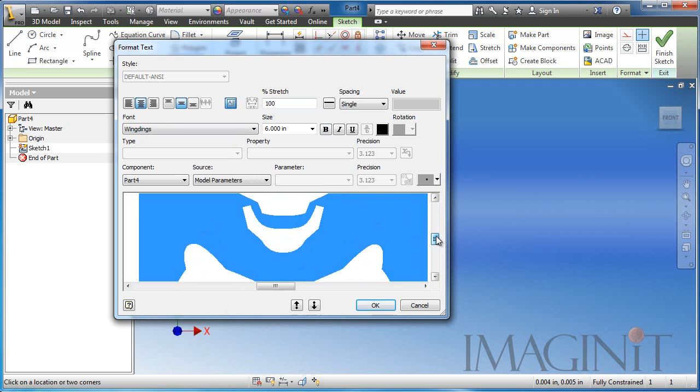I'm going to use Wingdings, and this is actually where I get the font for the Skull and Crossbones. We'll click OK, and I just want to take a moment and center this up, make it perfectly centered at 0. So we've got our initial sketch done.

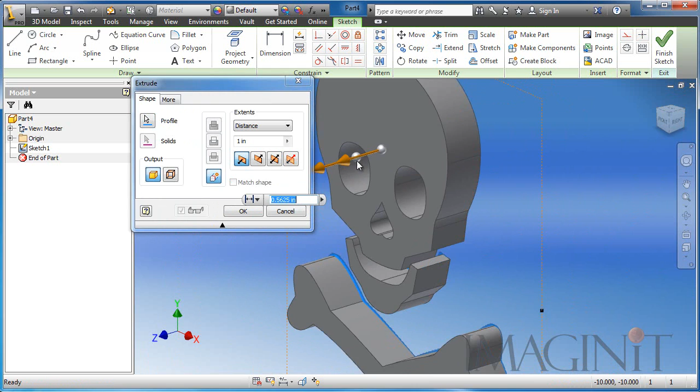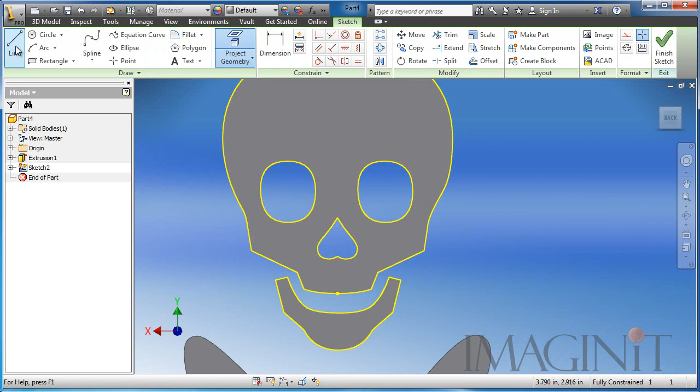I'm going to create a sketch on the back side, and I'm going to project the geometry of the jaw here. I want to draw some lines, and in this example, when I draw these lines, I do not want constraints to be added. So I'm going to hold the control button down, and that eliminates constraints from being drawn in our design.

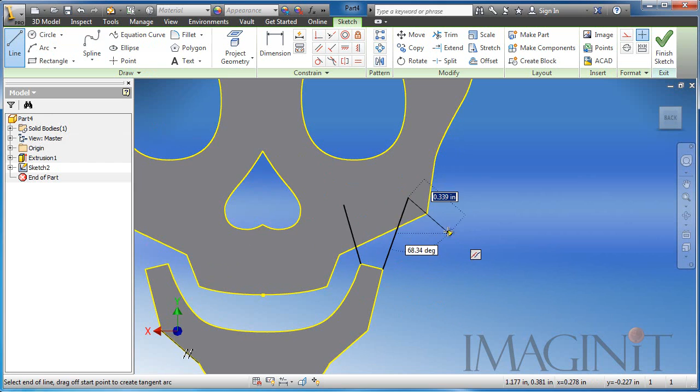Hold the control button down while I click, and I'm just going to draw these 4 lines. About there. And one more right about there.

I'm going to add some constraints. I'm going to add a collinear constraint to these outer lines and a parallel constraint to the inner lines.

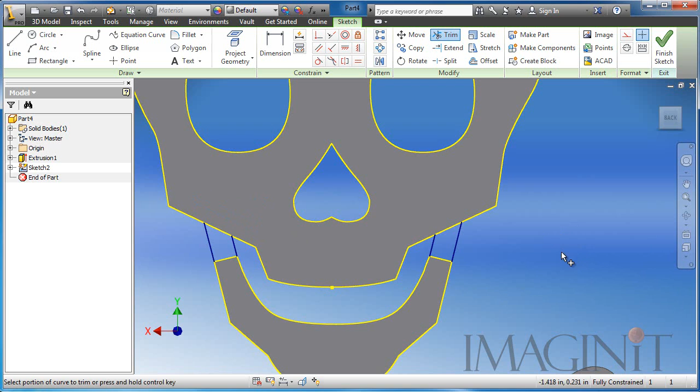I'm going to use my trim command. This is one of the nice features in 2013. I can simply hold the left button down and just drag and go over and get those lines and trim them back. So there we go.

Now, I'm going to use this sketch a couple of times. The first thing I'm going to use it for is to fill up the holes in the face. We're going to come upwards as a join. We'll click OK. Now, the front part of the skull is going to be a loft.

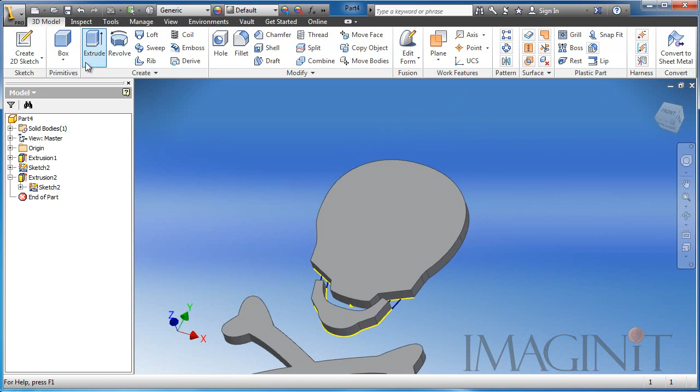Before I do the loft, I'm actually going to share this little sketch. We'll keep that on for a little while. Actually, let me go ahead and turn that off for right now.

I want to generate a work plane, the front face of the part, and I'm going to bring that work plane up about 1.25 inches. So there we go. I'm going to sketch on that plane, and I'm going to place a point right about in between of the skull's eyes, a little bit above his eyes, right there.

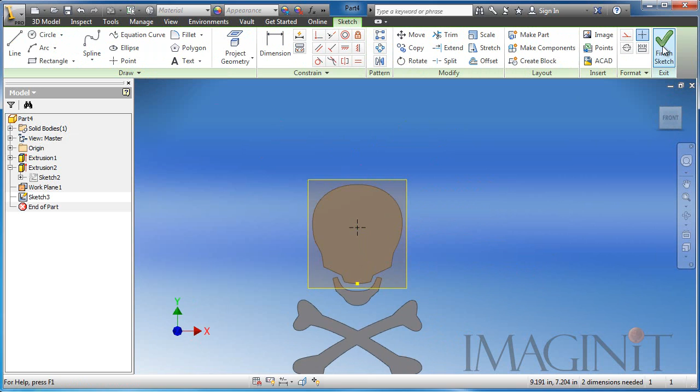And we're going to generate a loft. I want a loft from this face to that point. And under the conditions, I want to go ahead and select tangent. Look at that nice skull looking shape.

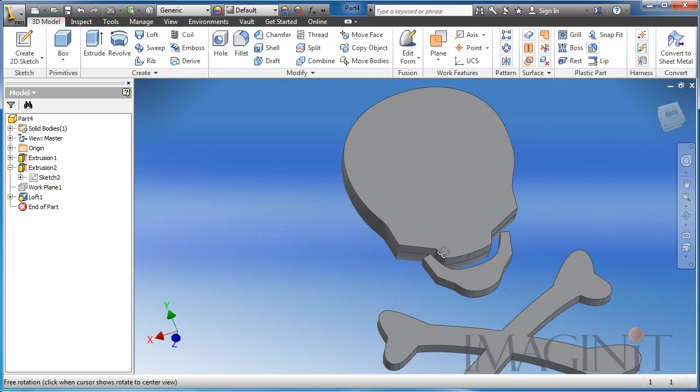And we're basically going to repeat this on the back side of the part. Now before I do, I'm going to sketch on this face, and I'm going to draw an arc from this midpoint to this midpoint, and then come down right about here.

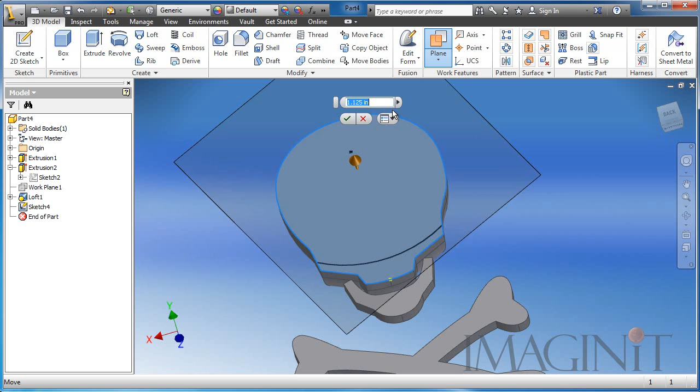So then I'll add my work plane, again about 1.25 inches or 1.125 inches up. We'll sketch on that and add our point.

Now when we add this point, we're going to kind of imagine this as a circle, this little profile area, and I want to put the point near the middle of that circle.

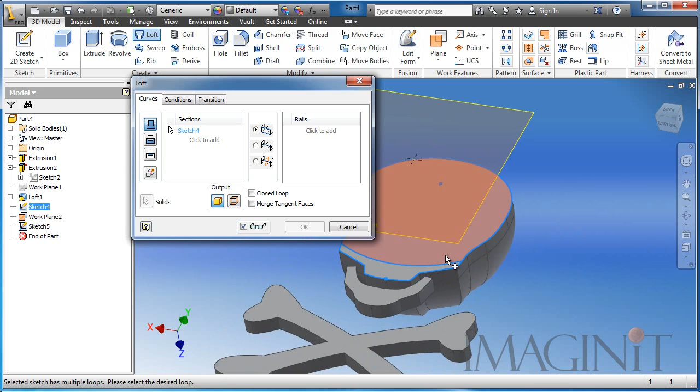When I do the loft this time, I want to select the sketch and then the profile. Then I can use the click to add option and select the point, and we'll change the condition to tangent. So there we go. We get the beginnings of the skull shaping up fairly well.

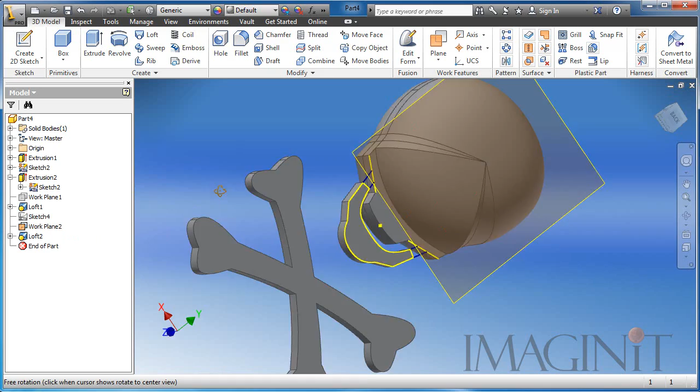Now, I want to go ahead and share that sketch, and we can get the little pieces of the jaw to come back in. These 2 pieces right here, we're just going to change those that direction. And I'm also going to add a bit more jaw here, that little profile right there.

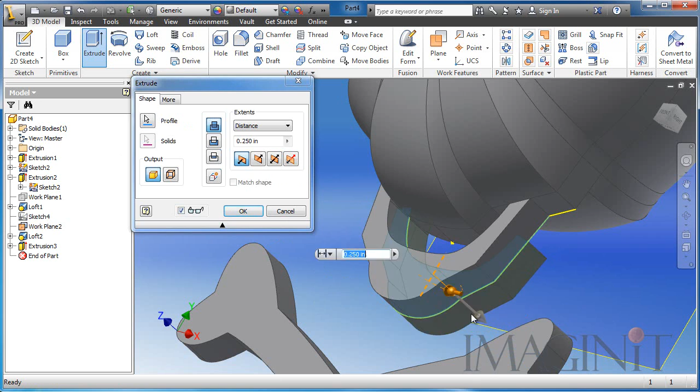We can simply drag it upwards. Oops, put that back to 0. Drag the line upwards. I'm going to make that a join. And that looks good.

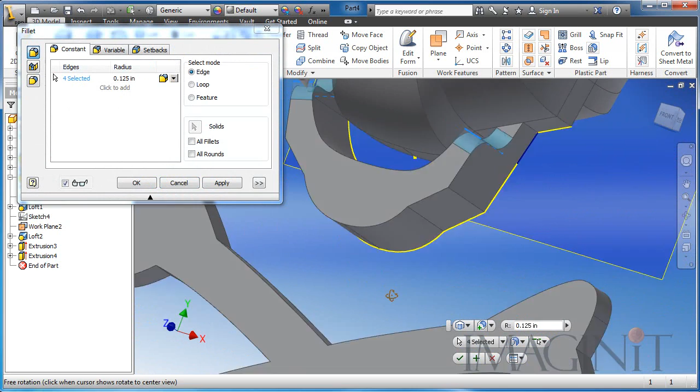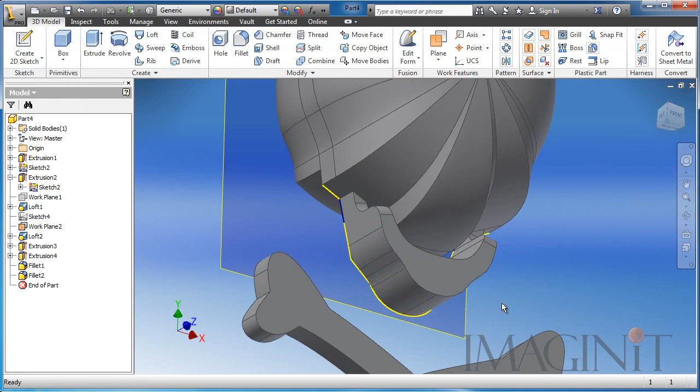We'll add some fillets to that. Click OK. We can also use our heads-up display and just launch the fillet command that way. There we go. Let's go ahead and add some fillets here.

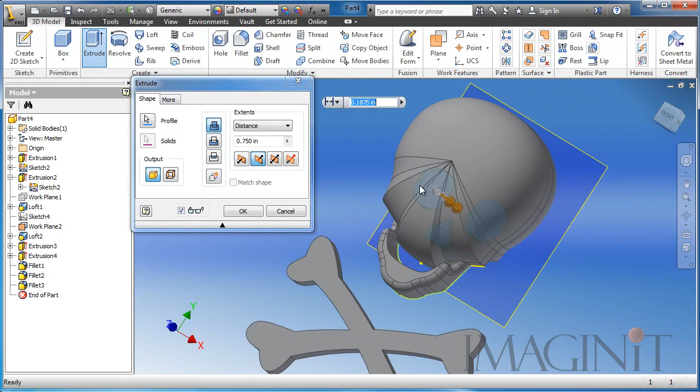And I want to do an extrude with the eyes and the nose. We'll pick that direction and come outwards at a cut. I'll click OK.

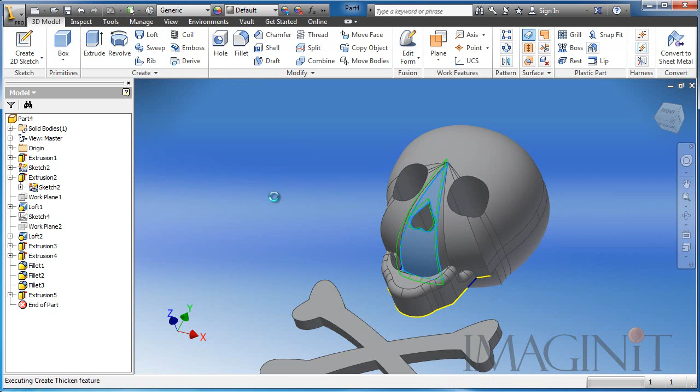So the skull is shaping up really good there. One of the things I like to do for the front of the skull is actually use the thicken command on that particular face. I'm just going to thicken it out about 0.1 and it kind of makes it a sharp face there. Looks a little bit better for our design.

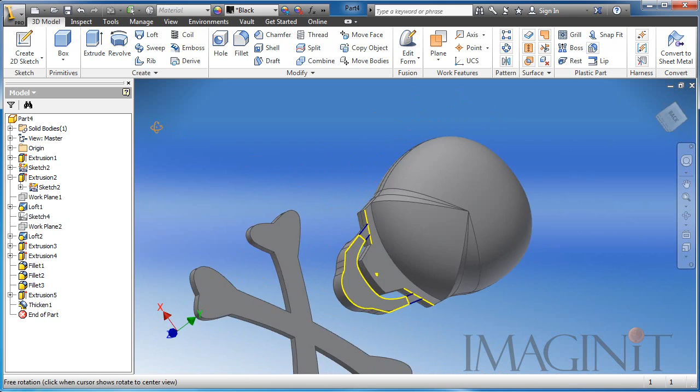In the browser, I could come in and find my extrusions for the eye sockets. And we want to change the colors of that. So let's just go up here and pick a black. And then for, let's see, let's finish up the jaw there.

Take the visibility off of that sketch. Let's sketch on that face. We'll extrude that out. Just a little bit, just to close up the back there.

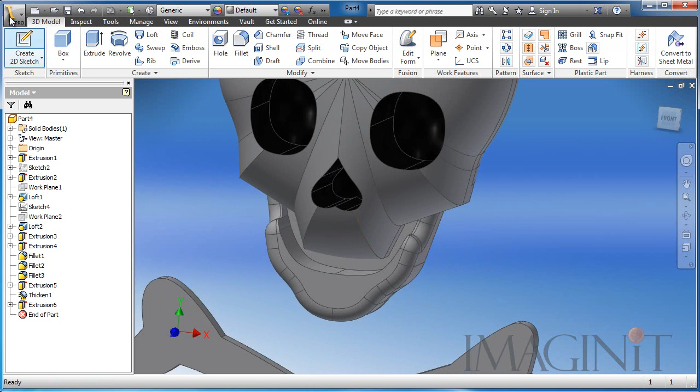And then we can come in here and select faces. One of the nice things with Inventor is we can color our faces any color we want. There we go.

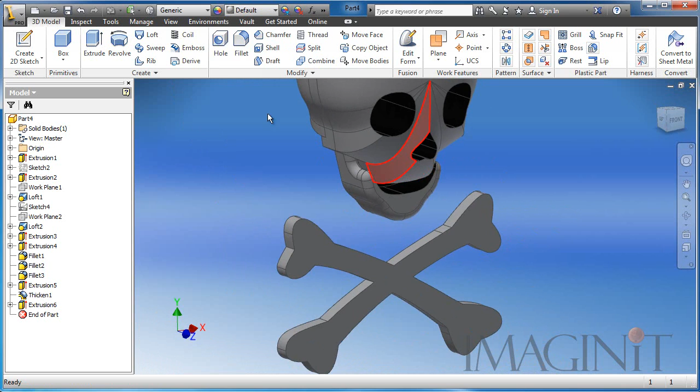And we'll go ahead and add another fillet here. This time I want to use the loop option. So we're going to pick the front face there. This entire loop there. And let's set that up to 0.06.

So there we go. Go ahead and change our visual style to just plain shaded. And maybe we'll change the appearance. So let's come up and say the overall part has, I don't know, let's use a diamond plate option. I think that looks pretty cool.

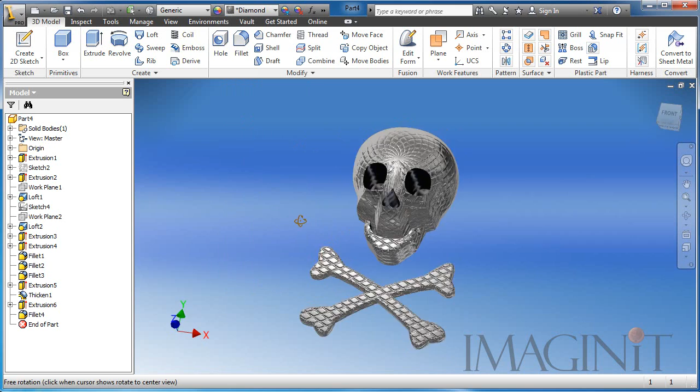Maybe we can turn on our shadows, maybe even our reflections. And we've got a pretty nice looking skull that we can use for Halloween. Let's finish up by, let's go ahead and modify our background.

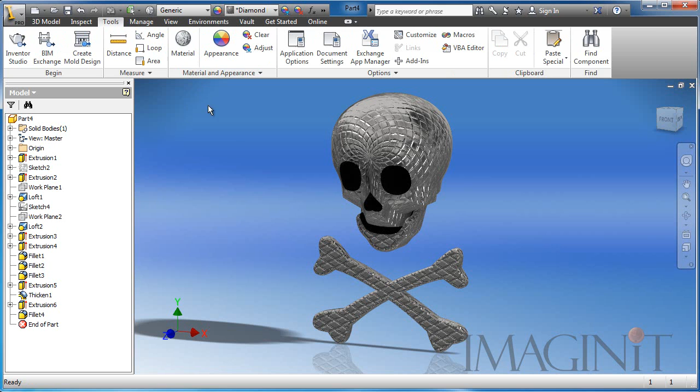Application options, we'll go to colors, and I'm just going to change my background image. Got a little Happy Halloween image file here. We'll select close. And there you go.